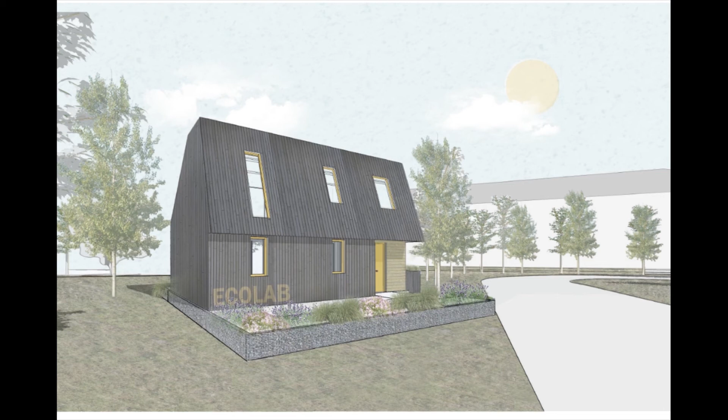The proposals of the EcoLab scheme have just been submitted to the Planning Commission, with construction due to commence towards the end of the year. The image you can now see shows you what the project looks like, giving a little indication. The following slides were extracted from the planning application documents and describe the development of the project up until this point.

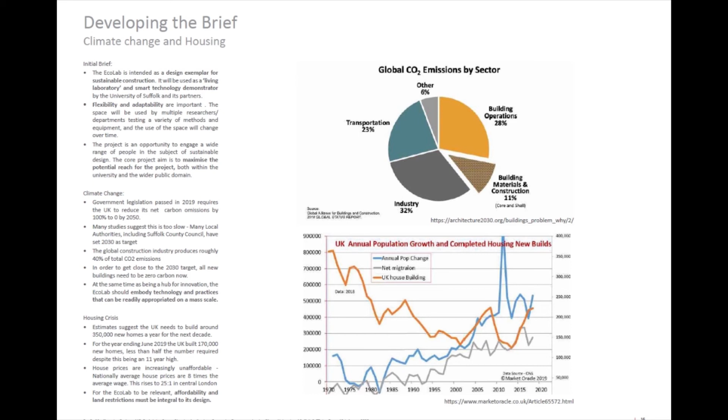uos.ac.uk. So the core aim for the project is twofold. One, as a response to the climate emergency and specifically the impact that the construction industry has on this, being responsible for roughly 40% of global emissions.

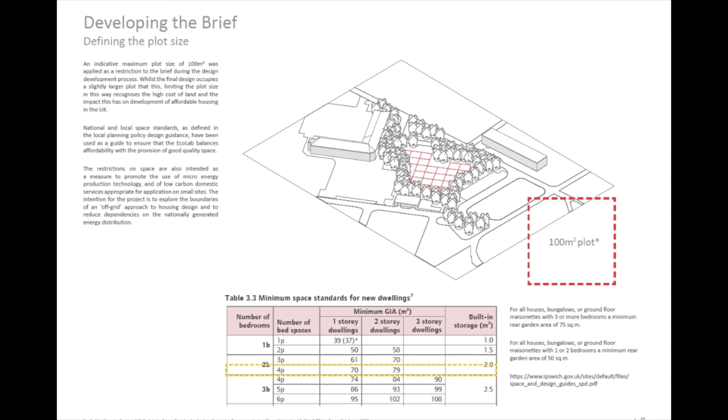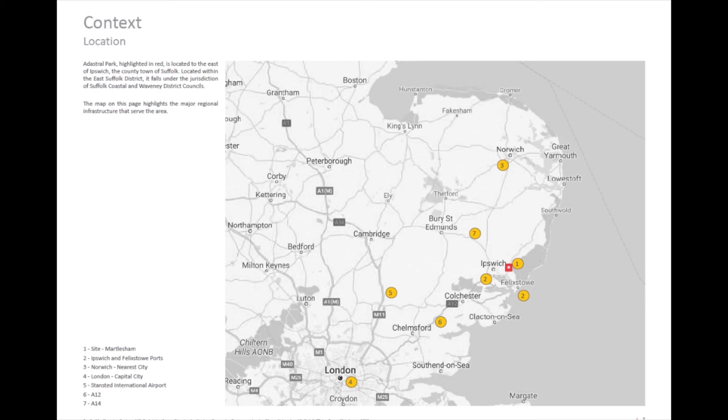In parallel to this, we have a housing crisis in the UK, specifically a chronic shortage of affordable housing. To provide some context, in the year ending June 2019, despite an 11-year high, we only built 170,000 houses in the UK, roughly half of that required.

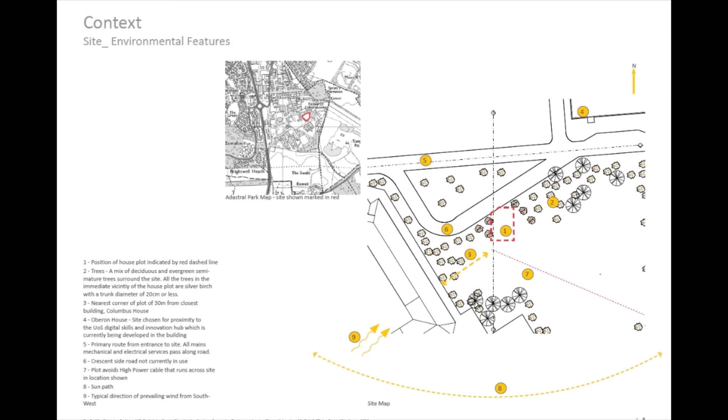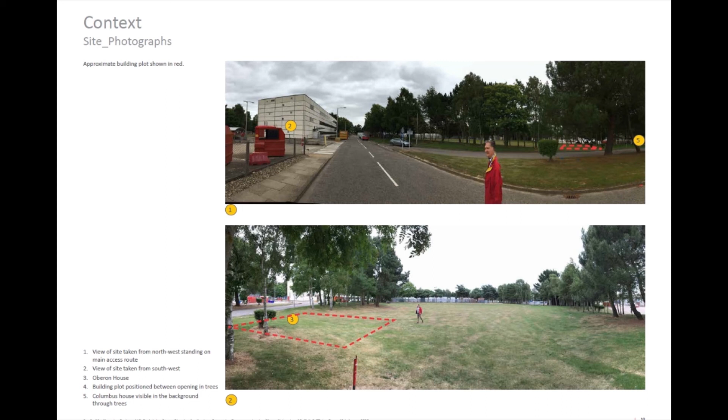The EcoLab brief is therefore to create a sustainable design exemplar. We're working to a limited budget of approximately £200,000. The initial targets are to achieve zero carbon occupancy, a reduction in embodied carbon of around 50% compared to a typical brick and block house, and to construct the building using the latest construction methods such as off-site fabrication, to try and create the potential for the model to be replicated at scale.

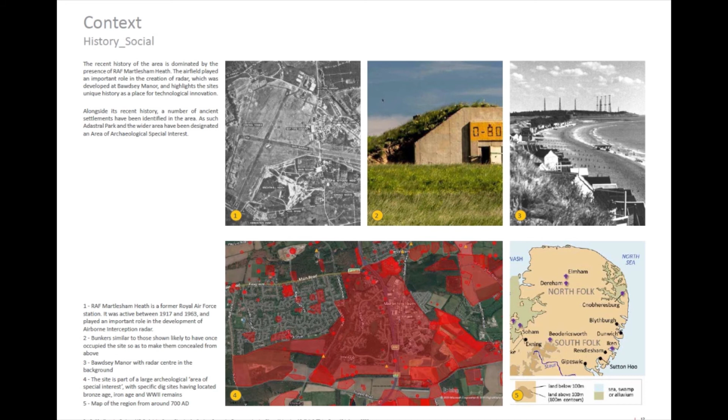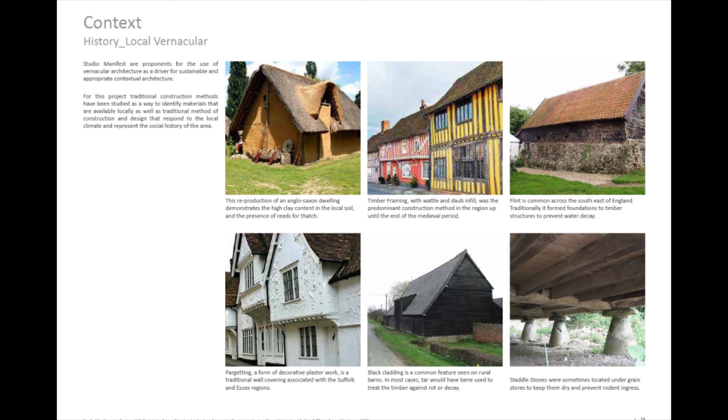In the longer term, the completed build will utilise smart systems to evaluate the performance of sustainable materials, low carbon energy and water consumption, coupled with critical consideration of the wider landscape through ecological design. Whilst we hope the research will provide valuable insights, we are also acutely aware of the urgency of the situation and the need to implement these outcomes immediately and at a mass scale.

This comes in the face of a construction industry which is notoriously resistant to change and is driven by the market, and that's something I'm acutely aware of from my own experience in practice.

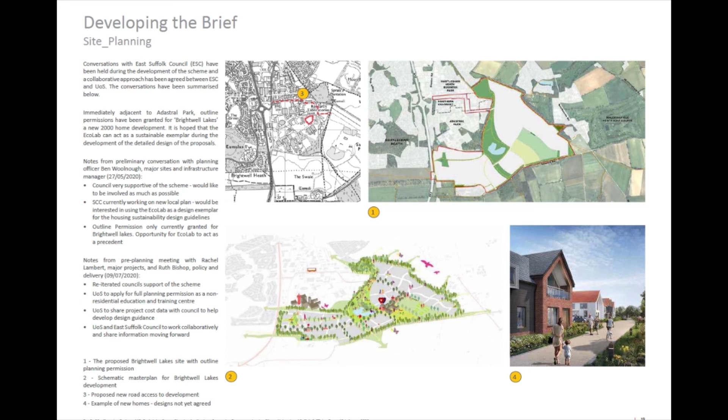These issues were highlighted most recently in the government report Building a Market for Energy Efficiency Call for Evidence Summary of Responses, published in 2019. Amongst other things, the report identified the need to build a market for energy efficiency. It also highlighted a potential lack of low carbon building construction knowledge and the impact that decreasing home ownership levels have on reducing the incentive to improve properties or buy an efficient home from the outset, demonstrating the mutuality of the climate change and housing problems.

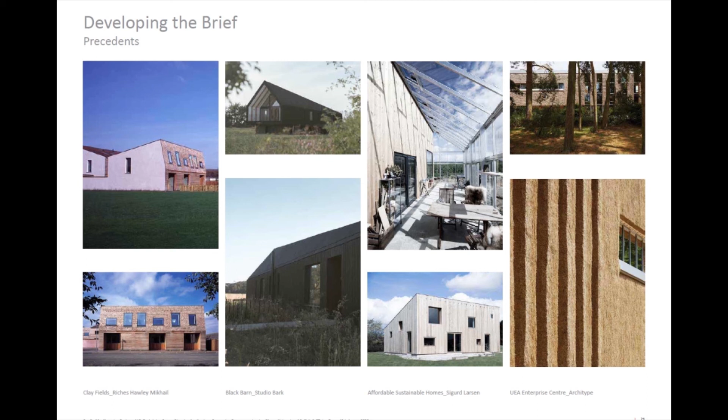So to this effect, our focus of work on the EcoLab so far has been to put in place a collaborative and open methodology that encourages dialogue and places people at the centre of the development of the scheme. So how are we doing this? Well, at an institutional level, the project team blends academics from the traditional sciences with those more closely associated with the social sciences. This cross-disciplinary approach is extended to partnerships outside of the university.

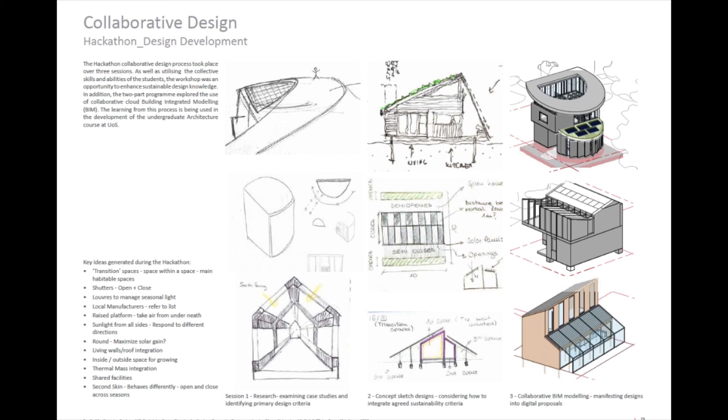Dialogue is ongoing with the local planning authority from East Suffolk Council, and as well as using the scheme as an exemplar for sustainable design, it's been agreed to share information on the project's costs to demonstrate that low energy, high-tech, sustainable construction can be used to build affordable homes.

Project links have also been established with the BRE, as well as advising on the technical performance of the building with a focus on occupant health. The long-term outcomes from the project will feed into research being undertaken at a national level.

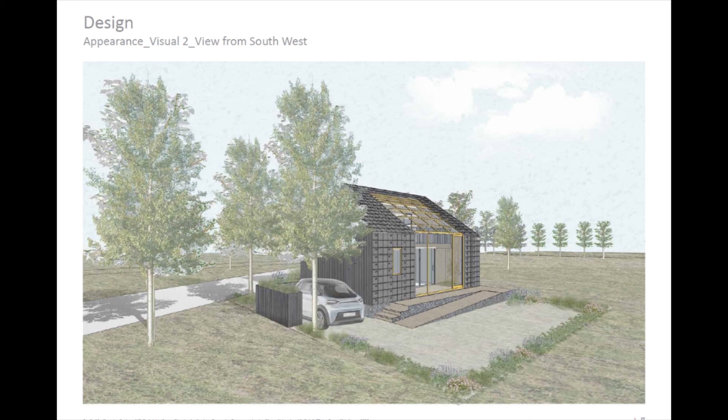The design process itself has also been collaborative. During lockdown, we held an online event called the EcoLab Architecture Hackathon, through which architecture students developed the concept designs for the project.

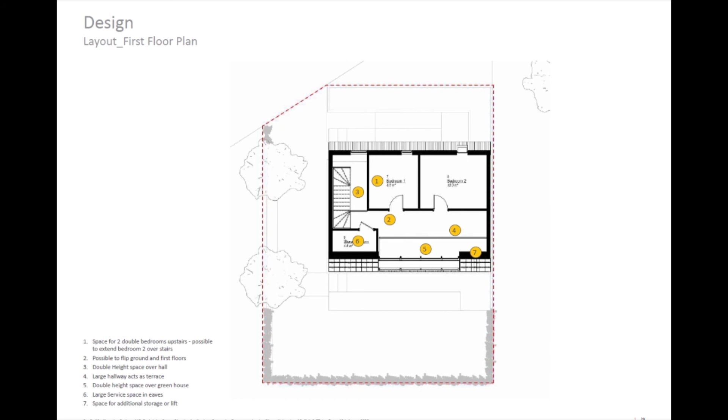This activity took place over three sessions with a group of around 12 participants. In the first session, precedents were assembled and sketch designs developed. In the second session, a collaborative BIM environment was utilised, through which the sketch designs were developed into 3D proposals, some of which are shown in the slides on screen.

As well as being a great opportunity for architecture students to gain experience working on a live project and to see their designs develop into a built scheme, the incredible energy and enthusiasm from the participants has provided the project with a unique platform from which to grow.

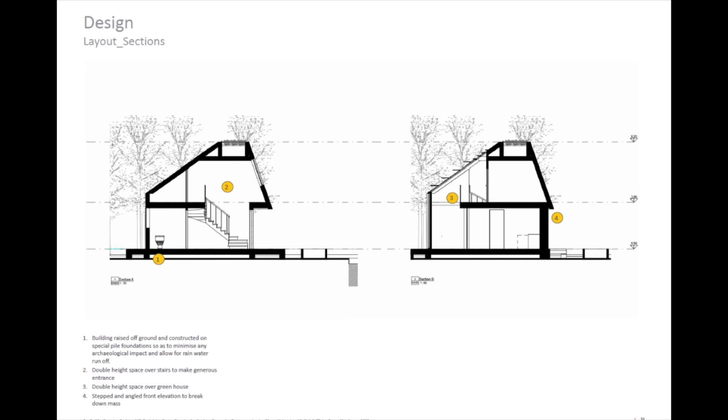Feedback from the session was also very positive, with all the stakeholders rating the event either very good or excellent, feeling they had learned a significant amount about sustainable design.

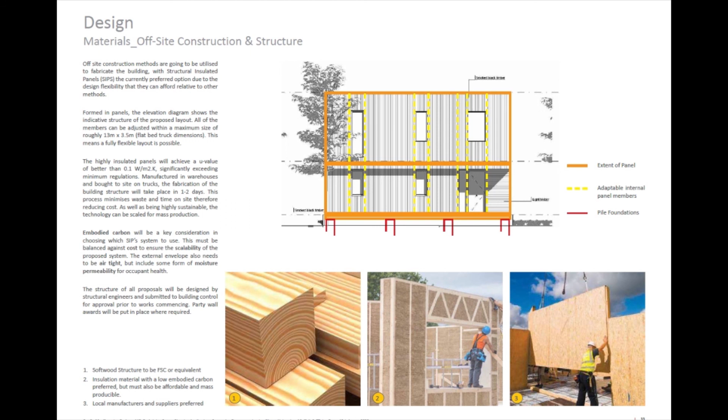So at the University of Suffolk, we believe that activities such as this are an essential component in ensuring that all actors involved in the development of the built environment are equipped with the requisite low carbon building construction knowledge. And it also outlines the type of approach that we are trying to take to training young architects.

So the ideas from the hackathon have actually directly influenced the proposals of the building, some of which you'll see coming up on your screen.

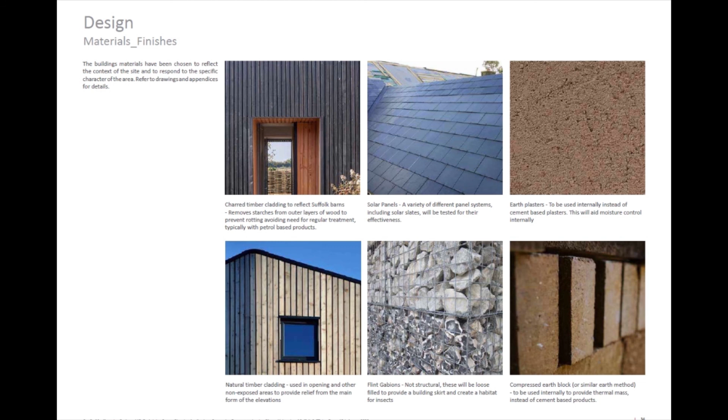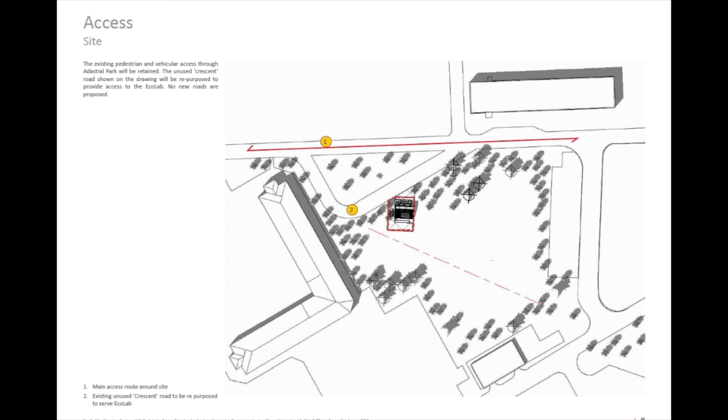Whilst being used as a research lab, the compact building takes the form of a 2-bedroom house. It's built using a SIP system and will achieve U values of 0.1 or better. It'll also be clad in locally sourced materials.

So looking ahead, further collaborative design initiatives are planned. University of Suffolk's architecture students will play an active role in the detailed design and construction of the scheme. A similar collaborative design event is being planned with the wildlife, ecology and conservation science students.

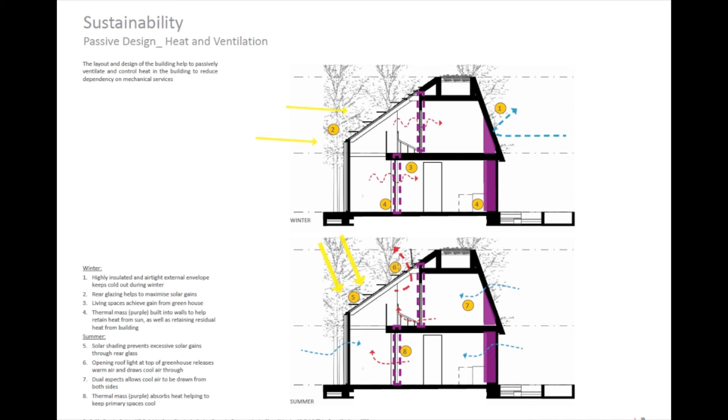Following the completion of the building, regular studies are expected to be undertaken with the building in occupation, including inviting members of the public to use the space to test how intuitive and user-friendly the various smart technologies are.

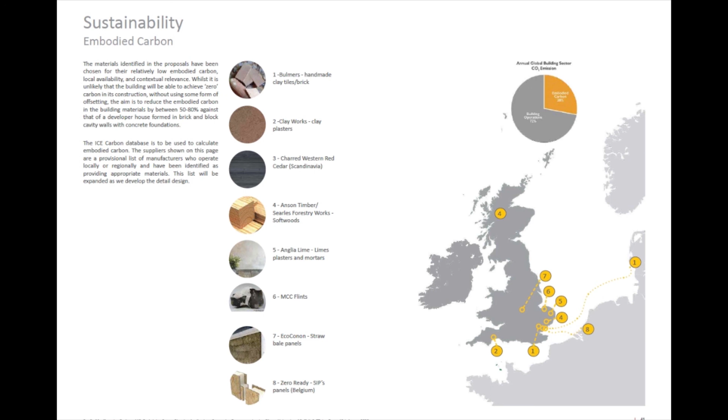But in the immediate future, the priority is to raise the public profile of the project, not just within academic spheres, but also particularly to the wider public.

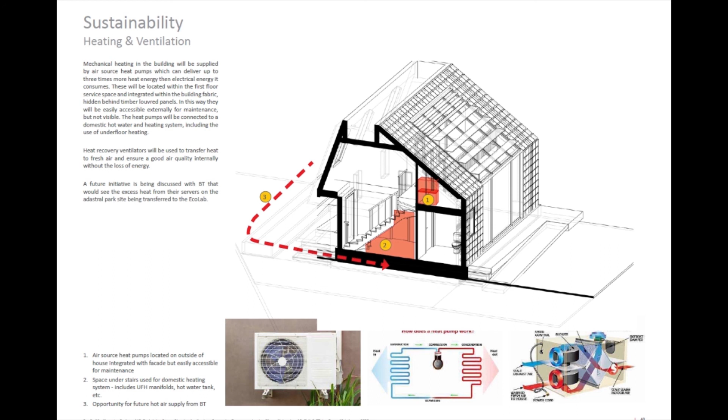So to this effect, the design of the building is intended to be eye-catching, not necessarily to everyone's tastes, I will admit, but this, I hope, will aid with a media campaign, which we are intending and beginning to put out for the local and national press, as well as the architectural and lifestyle publications.

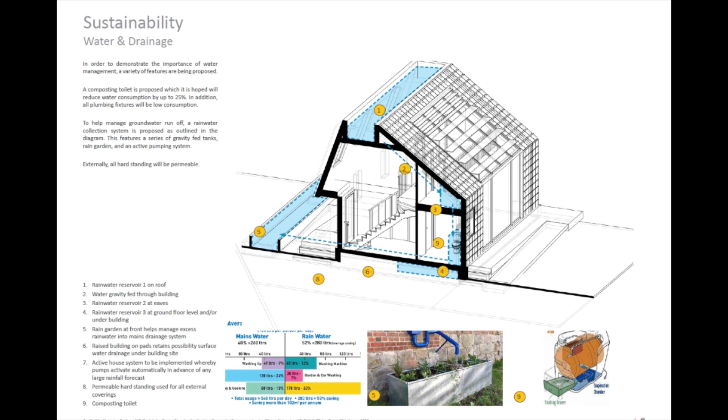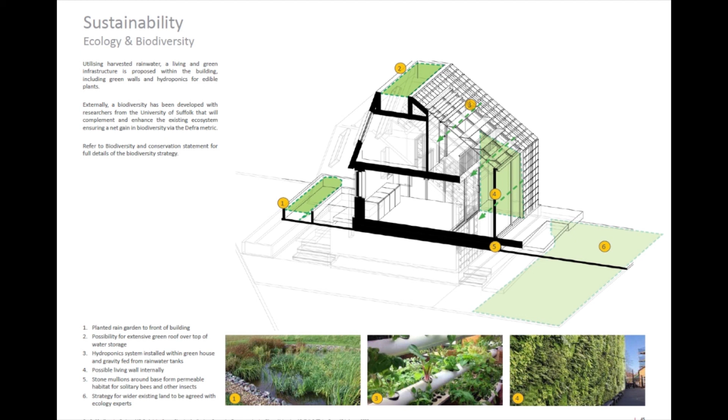It's hoped that the attention in these areas will enhance the longer-term relevance and reach of the scheme. And if there's anyone watching today who can help with this, we'd be extremely grateful, and anything you can do to help us raise the profile of the scheme or share the project would be of massive benefit.

Just to briefly summarise then, so within a collaborative framework, we're working collectively to realise the wider social and affordability aspects of greening the built environment, and to develop a scheme that's not only technically excellent, but which is designed for people. A big but valuable research ask from what will be a compact, modern and comfortable building footprint.

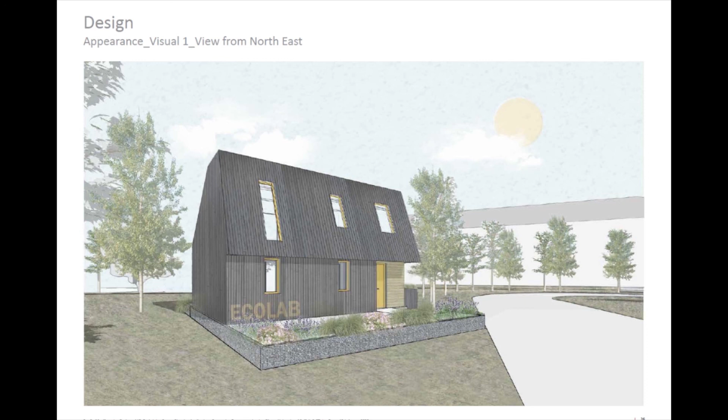At a time when land availability, resource usage and quality affordable housing represent a national challenge. Thanks very much, and please feel free to contact me if you have any further questions.